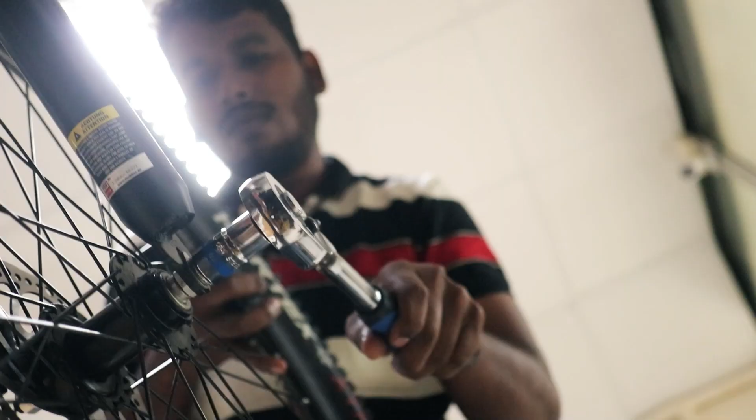Hence, to build on this momentum and inspire more action to build a healthy, sustainable, green and livable institution, NITK Surathkal has designed and developed the e-Cycle Vidyut 3.0 for campus usage.

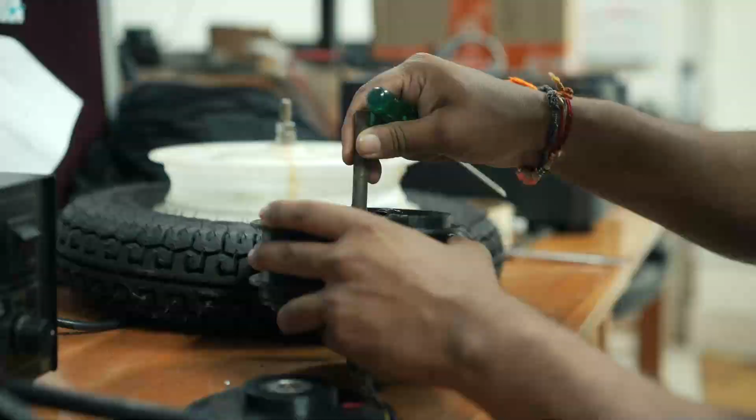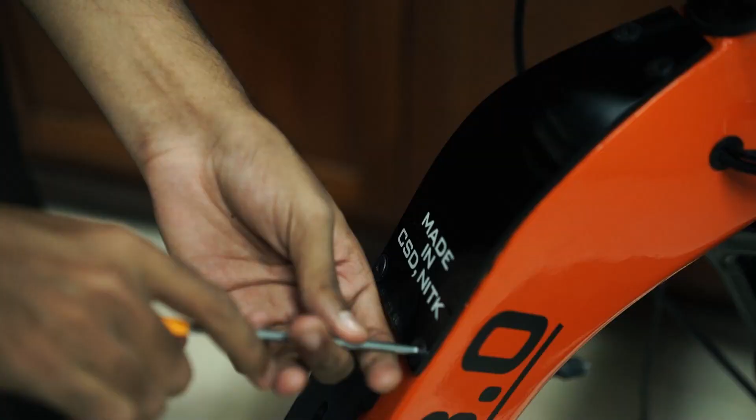The e-Cycle is powered by a brushless DC motor initially in the pilot stage. It will run on lithium-ion battery. Typical motor power and battery is 250 watt and 36 volt. The e-Cycle also has a pedal assist feature.

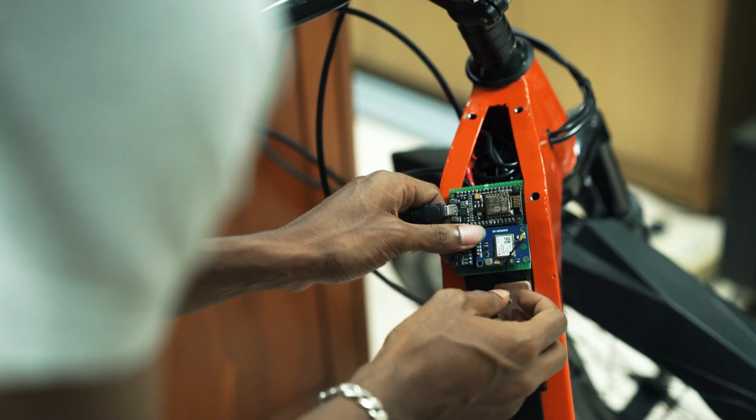Additionally, with the IRIS being an integrated resource and information sharing system developed in-house, system integration of this e-Cycle features a GPS module which will enable the user to track the location of the e-Cycle within the campus. Also, the students will be able to unlock and use the e-Cycle by scanning the QR code on the e-Cycle. This QR code will be used to clock the number of hours of usage and the user.

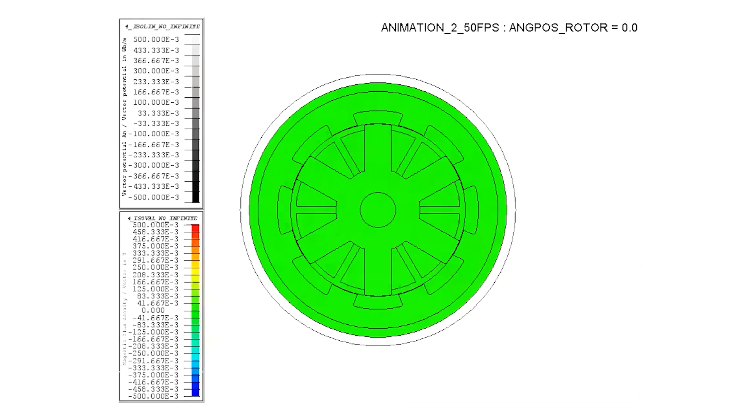Brushless DC motor is planned to be replaced by switched reluctance hub motor. SRM, being both magnetless and brushless in nature, is a viable candidate which can provide equivalent torque densities both on volume and weight basis.

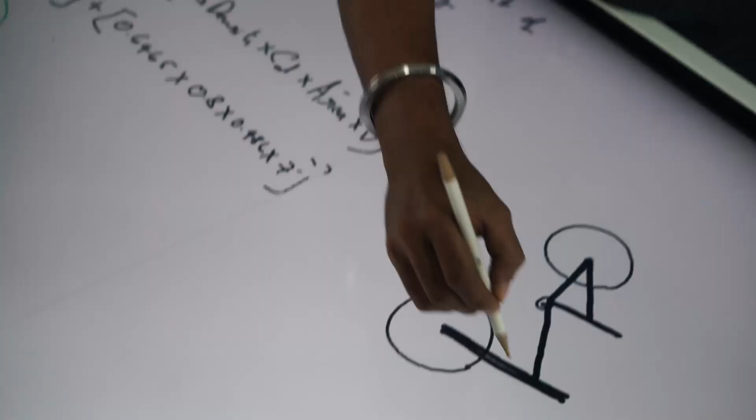Vidyut 3.0 is designed and developed in-house utilizing the world-class manufacturing facilities like 3D printing, laser cutting, 3D modeling, etc. The team wanted to design an e-Cycle catering for both men and women, while also maintaining a sleek and modern look. 3D modeling was done using institute-licensed design software tools. The main frame, manufactured using a laser cutting facility, was tested to meet the design requirements.

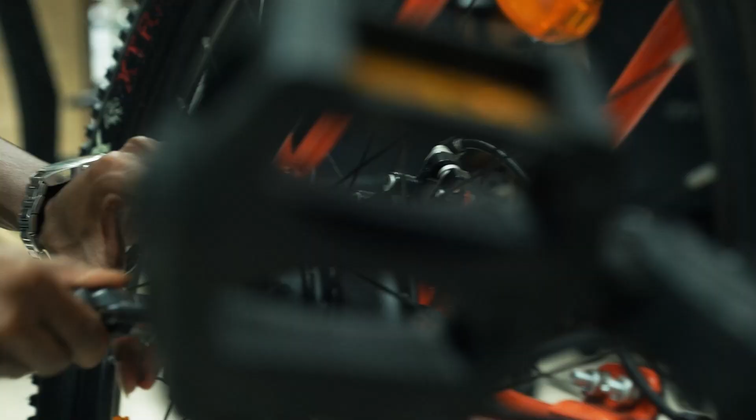This e-Cycle, Vidyut 3.0, was able to see the light of the day solely due to the generous contribution of 1981 batch alumni. Alumni have always been spearheaders of the institution's pride. As a result of their funding, one e-Cycle is developed as a pilot study.

The alumni belonging to the batch of 81 had created corpus funding to fund a lot of projects that could be taken up at the institute, and e-Cycle was one of those initiatives. We had not funded this project initially, we had funded other projects, but then there was a lot of unspent money left with the fund that we had provided the institute, and this was repurposed for e-Cycle.

And people who are involved with e-Cycle, they have come up with a prototype which is actually working very well, and they would like to improve upon the product further and make it available to many students so that their comfort in traversing between the hostel and the institute becomes easier and better.

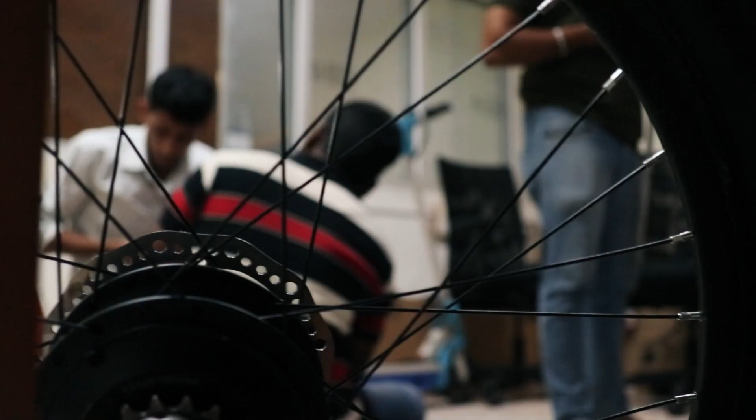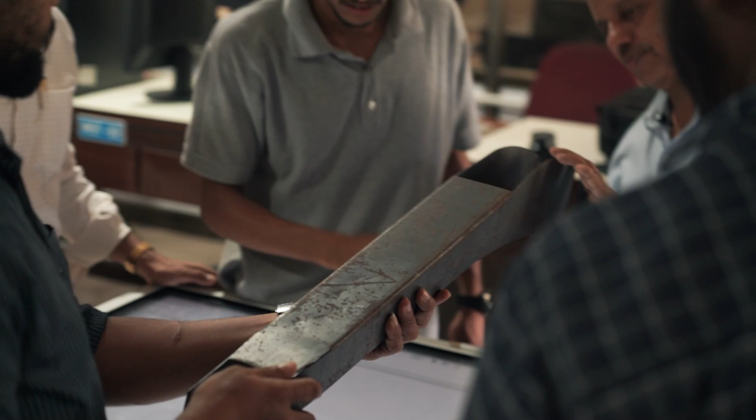A daunting task will seem effortless when abundant support from alumni, who are the backbone of the institute, is received by the dedicated team of project staffs, students and professors at Center for System Design, NITK Surathkal, behind this e-Cycle.

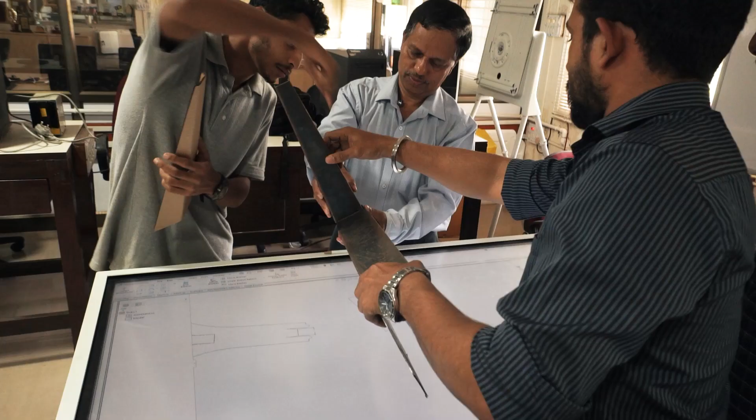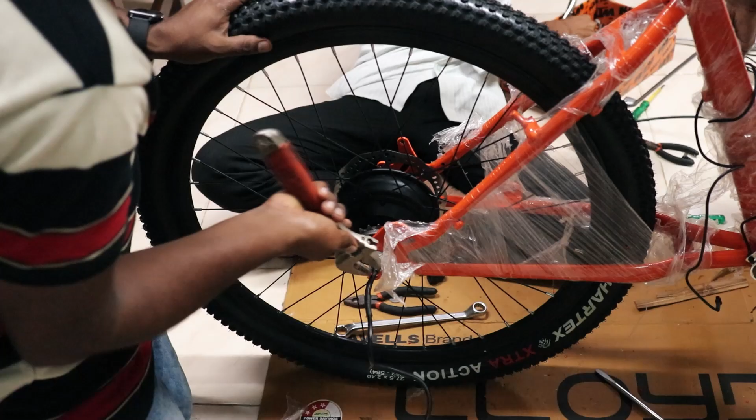NITK Surathkal is proud of its alumni spread across the globe who are leaders in industry, central research organizations and various public sector organizations. They have all the time supported their alma mater in its upbringing the younger generation. In that context, e-mobility is one of the prime projects in which alumni are generous in funding and supporting this project in totality. We are proud of them once again.

The team from NITK wishes to see many more successful ventures to make NITK an e-mobility friendly campus from alumni support.